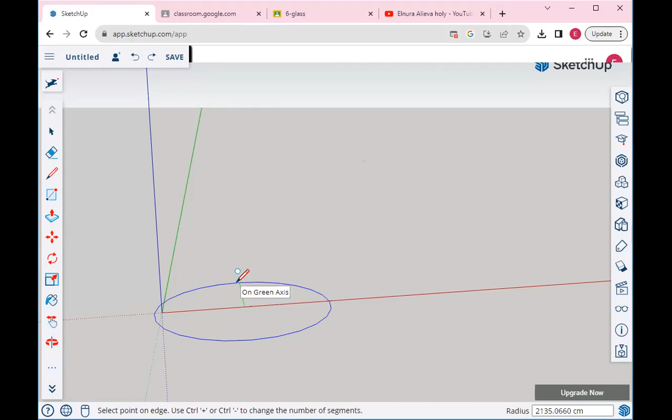Hello guys, today we are going to make a glass like this, and it's pretty easy because this is not so hard as previous examples. First, we are going to use the circle tool to make the bottom of our glass. In this exercise the size is not very important, we are just going to make some glass.

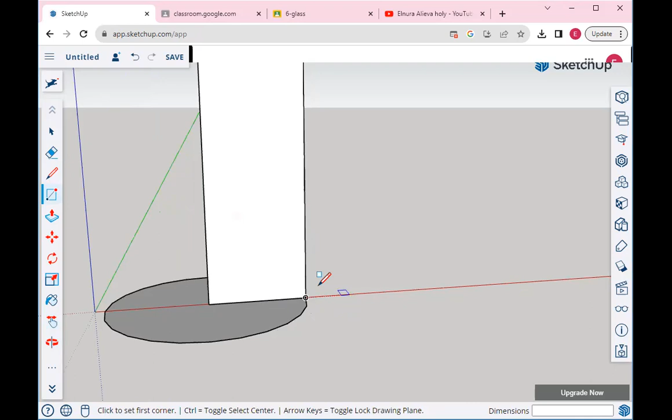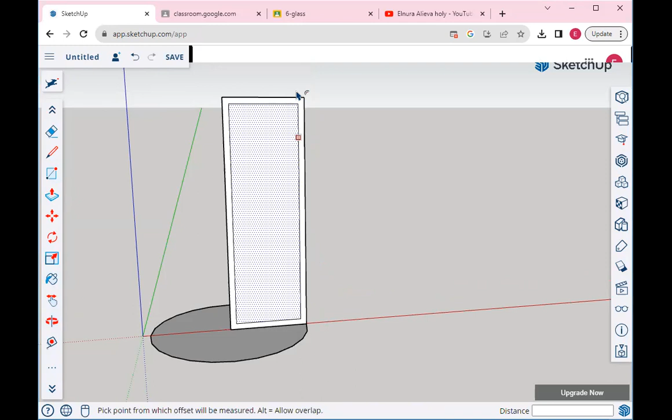So I'm going to make one line that will be vertical. Next, I'm going to make here some rectangle. Okay, if it's on the end, it's beautiful. Now here I'm going to use my beautiful tool called offset tool. It will be much easier for me to use the offset tool for such reasons.

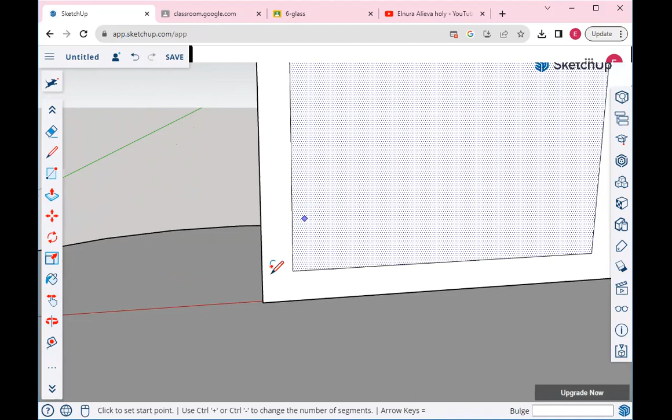Now I'm going to use here the 2-point arc tool. Click once, click here twice, second, and here the third click. And at this point I'm going to make one line, just press click and click. Okay, let's delete everything that's unnecessary for us today. Okay, I have a beautiful thing that I can convert to a glass.

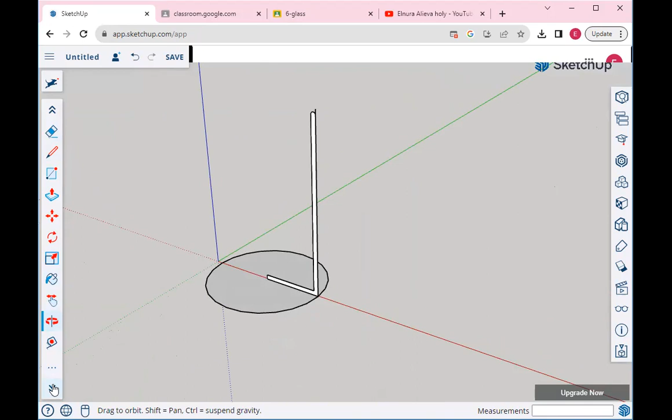Now I'm going to use here the follow me tool, and make it circle. Okay, I have a really beautiful glass.

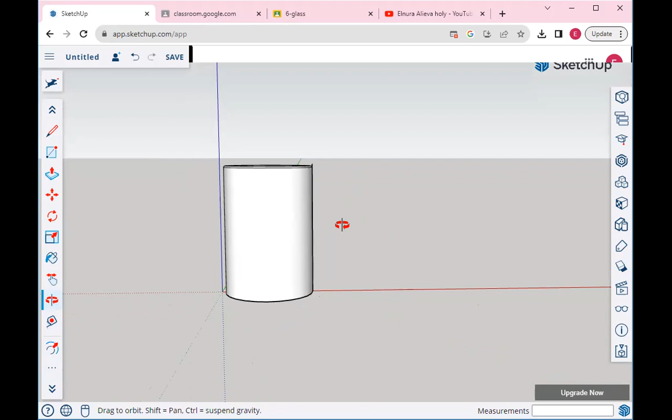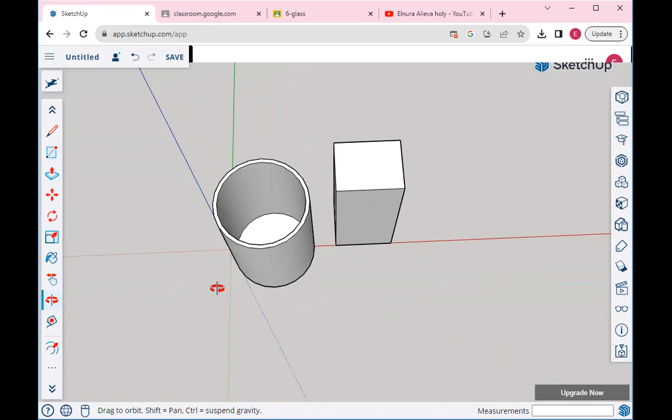Now for the second thing, I'm going to make the handle for this glass. For this, let's draw a rectangle that will be directly on this red line - this red line is a guide for me. I think this side is okay. Now let's make it up and let's check, is everything okay? Okay, I think it's great.

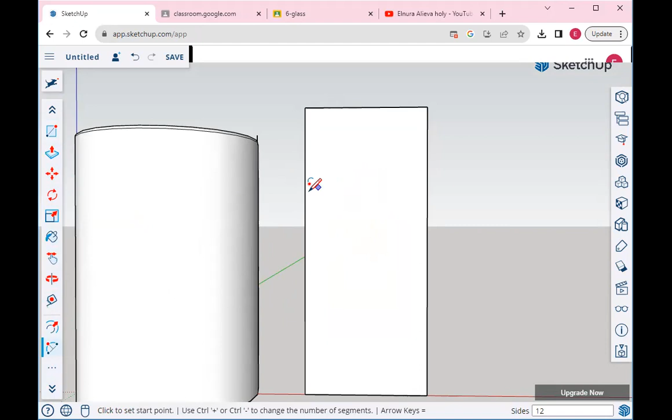Now I'm going to make here something like a handle for this glass. I think it will start from this side. Let's use the 2-point arc tool. It will start from here and here it will be circular, and in the end there will be some line. I think it's okay. If you want, you can make some small difference, up to your wish. Okay, this is okay for me.

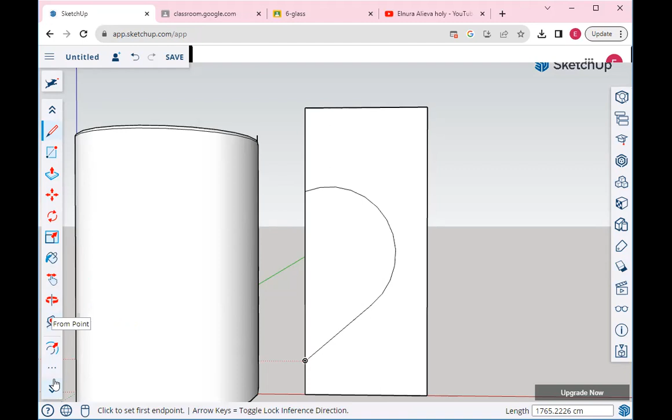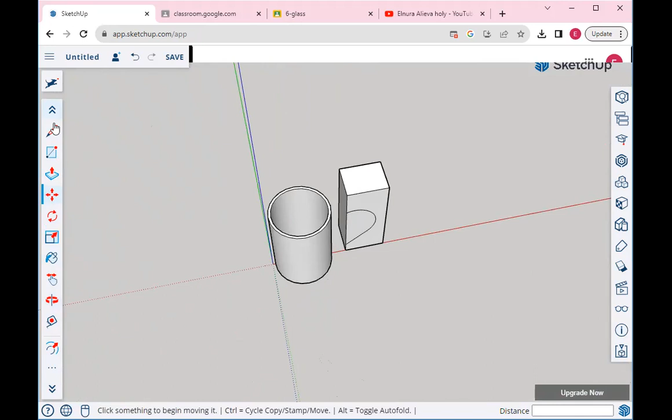I'm going to make something like a circle inside of it. Okay, let's come closer. I made it too close to my glass, that's why it's not very easy for me. Let's make it further from it. Okay, let's move my object a bit, I made it too close. Okay, select the object, now I'm going to move it like this, it will be much easier for me.

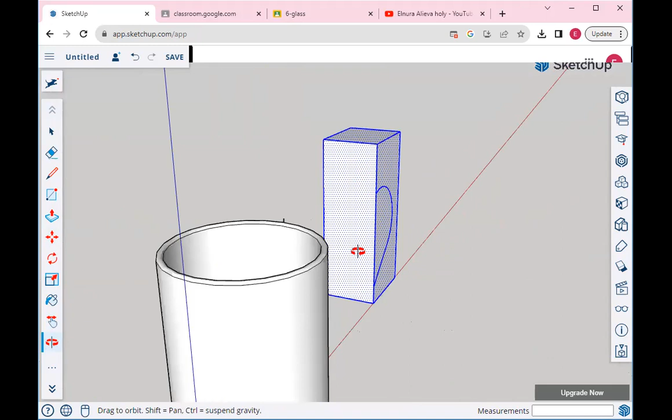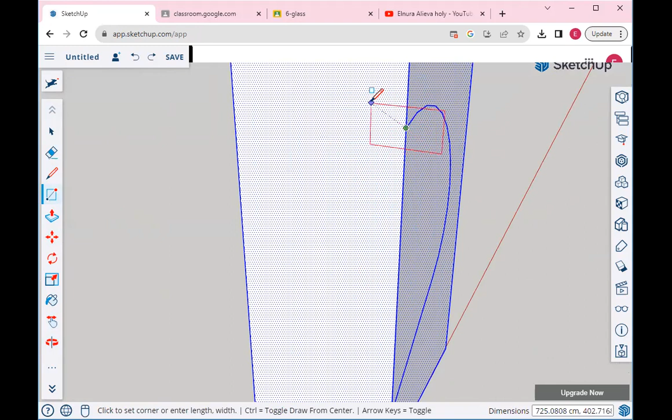Now I'm going to draw here one rectangle, and this rectangle should start from its center. Now if I draw, it's not a center - to make it center, use the Control key. Press on Control, now you are drawing from its center, and I want it to be something like this. Okay, and on its edge, I want to use the 2-point arc tool to make it a bit circular.

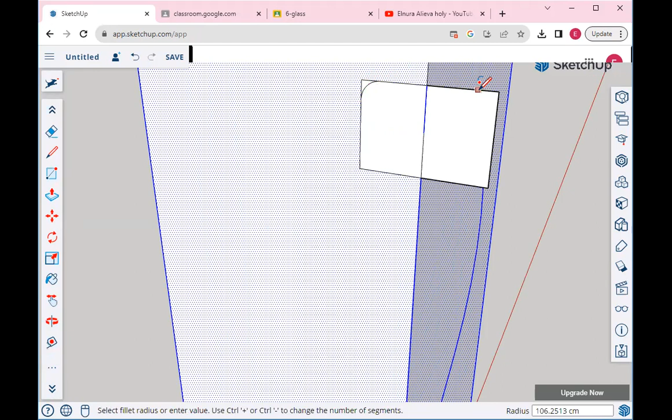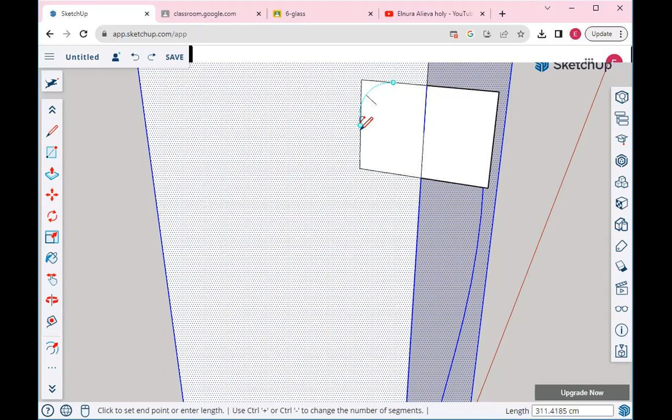Actually, to make the same size things, you can use the 2-point arc tool to come to its midpoint, to its second midpoint. Then the size will always be the same. I'm coming to its midpoint and to its midpoint, to be sure that the size is the same.

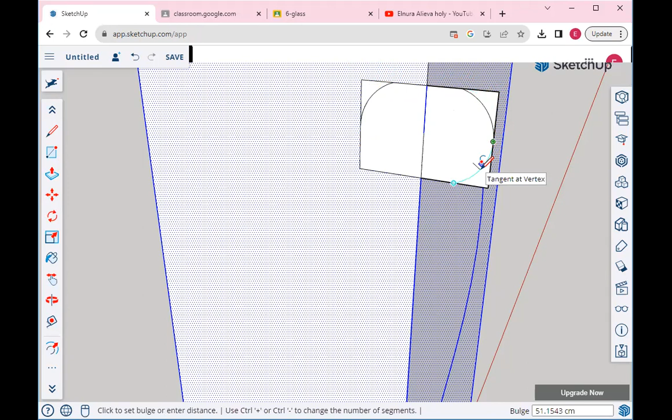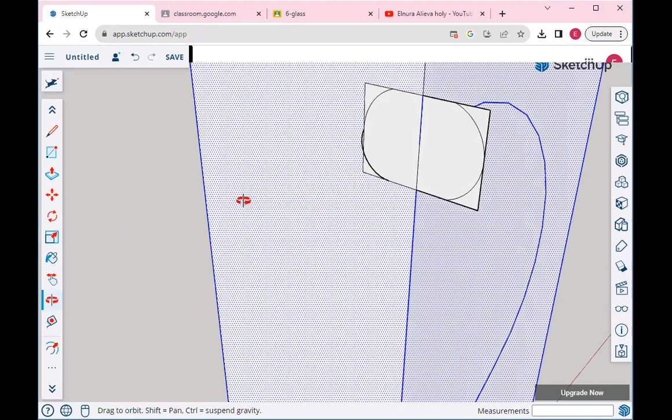Okay, it's beautiful. From its midpoint to this midpoint. I hope everything is great, but I'm not sure about the last line. Yes, the last line is not okay. Okay, let's do it again.

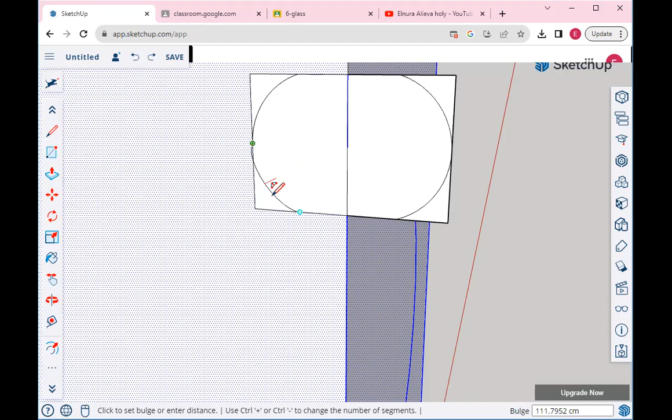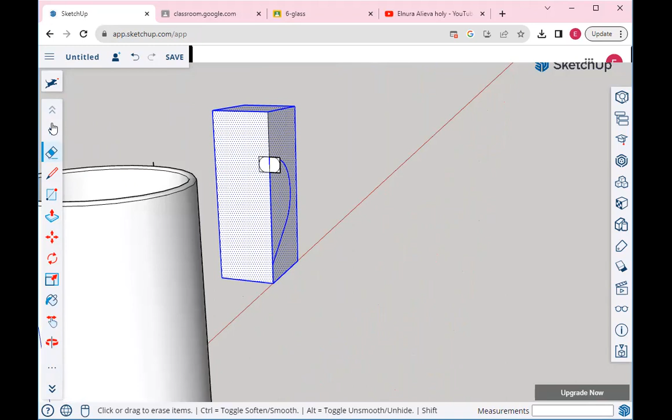Pressing click here, and make it - it should be something like bluish, yes? Come on, work normally. Okay, now it's okay. Now I'm going to delete everything that I don't need, just leave the circular parts. I'm taking the eraser here, first let's untouch it, take the eraser and delete all unnecessary parts. All I need will be this line and the circular part inside, yes.

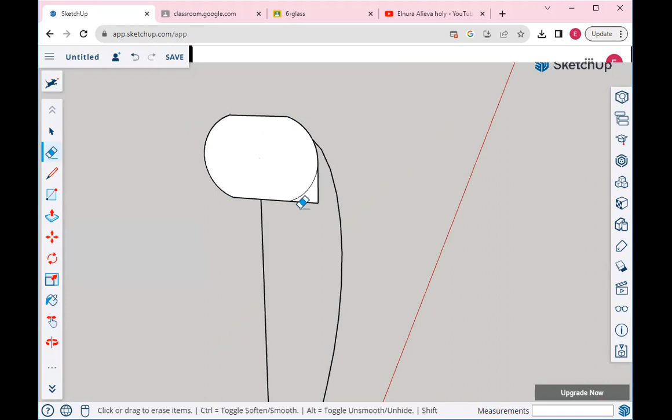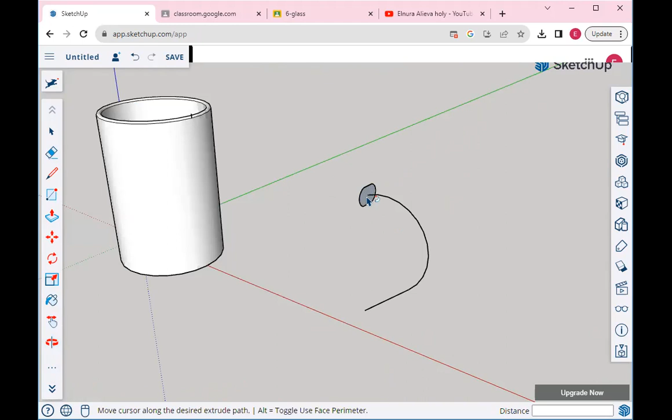Okay, beautiful. Now I'm going to use the follow me tool. But to use it, we have to see its start and its end. Now I see the start, I see the end. I take the follow me tool and use it to make the beautiful handle.

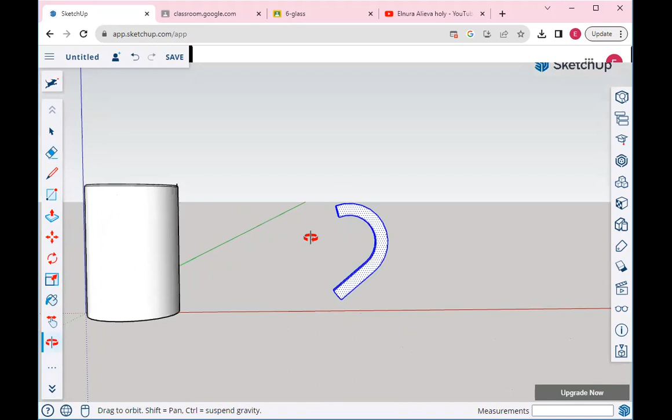Now, what if I try to move the handle? Here, I'm selecting all the things and let's put it the way that will be easier to move. Okay, I think this side will be okay. Using the move tool to move my handle - if it's red, it's great. Now, does it look like a normal handle? I think yes, and leave it.

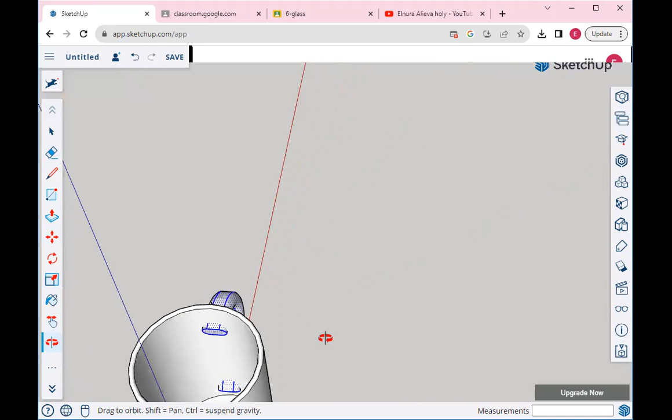Now there will be a small problem inside - as you see, there will be some handle parts that are seen inside. I don't want to see these, I want to delete it. But if you try to delete it now, it will delete the whole handle, that's why we are going to do something different.

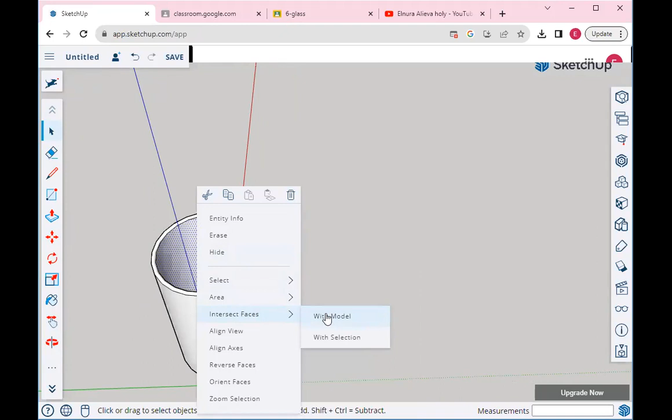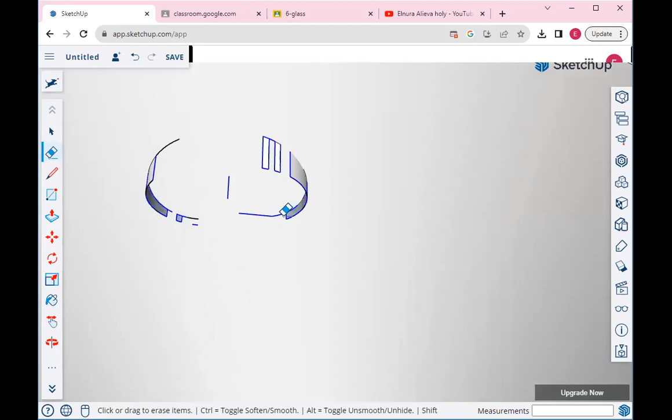Selecting the inside of the glass and say intersect faces with model. Now these lines, the outside of the cup, and these lines are separated, and you can just delete them using the normal eraser. Of course it will take some time to erase all of them, but it's possible. Otherwise, if you don't intersect with model, it will accept itself as a part of the whole handle and will delete the whole handle if you try to delete something inside.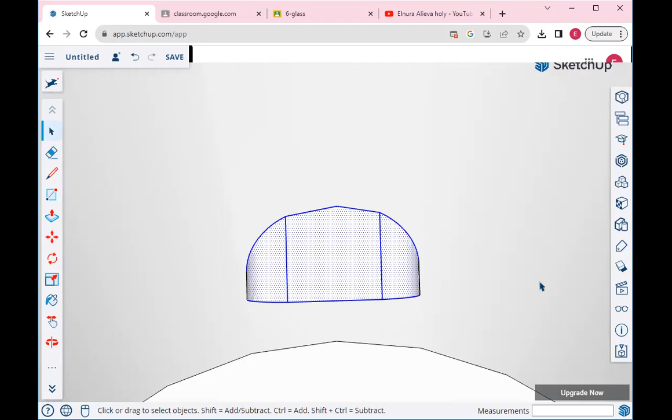Okay, now let's use the selection tool and delete them. Now here, the down part also the same - I'm going to select them all and delete. Oh, by mistake, sorry. Let's delete some parts and after that use this delete everything approach. Now let's try to use it again.

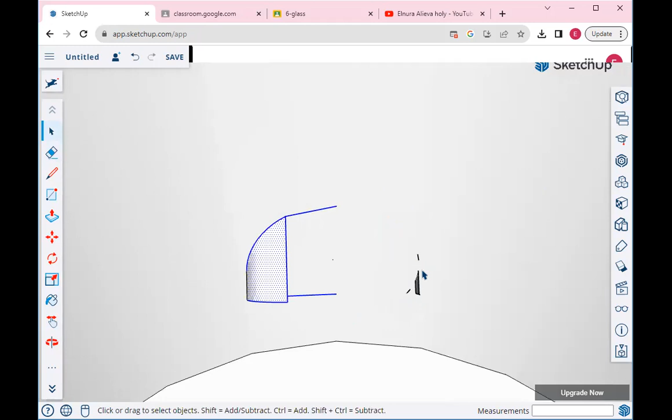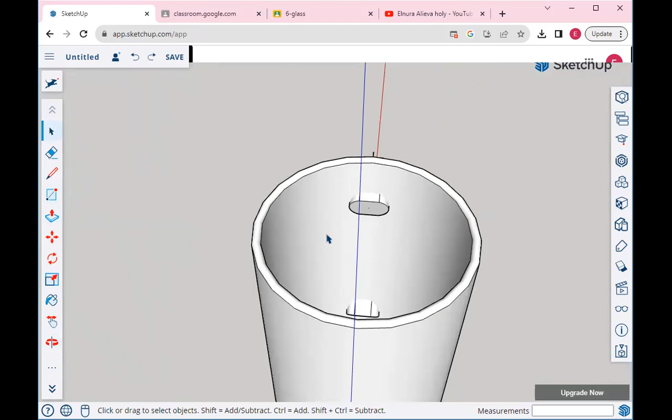Okay, now it's great. Now what are we going to do here - we made the intersect with model. Yes, why is it still deleting everything outside? Okay, let's try to do it again. Click on it, then intersect with model, and try to delete it. It shouldn't delete everything. It's not deleting - okay, don't select them all. I think the problem was there.

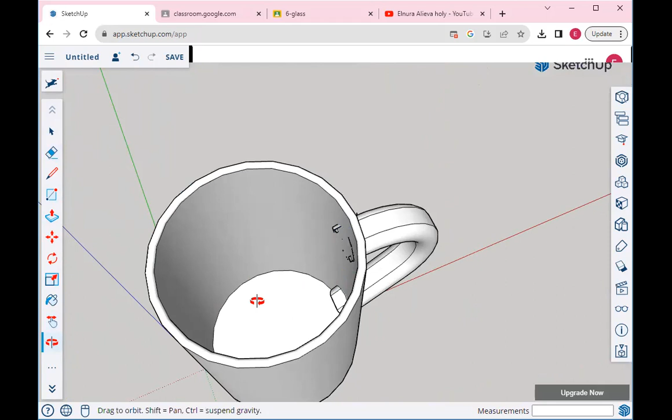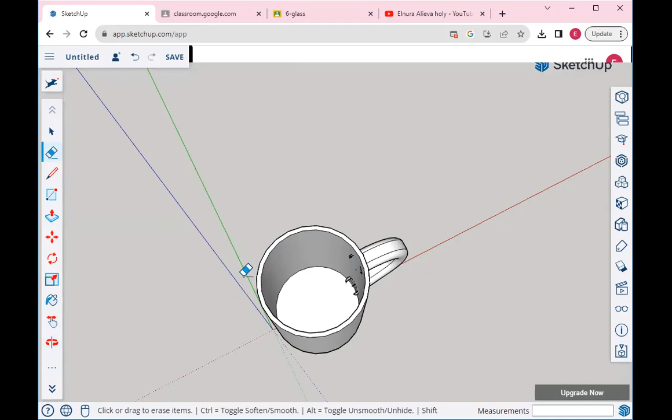Okay, you're going to do it a long time, but you're going to delete everything yourself. Next step, when you finish deleting it all, you are going to recolor it and rotate.

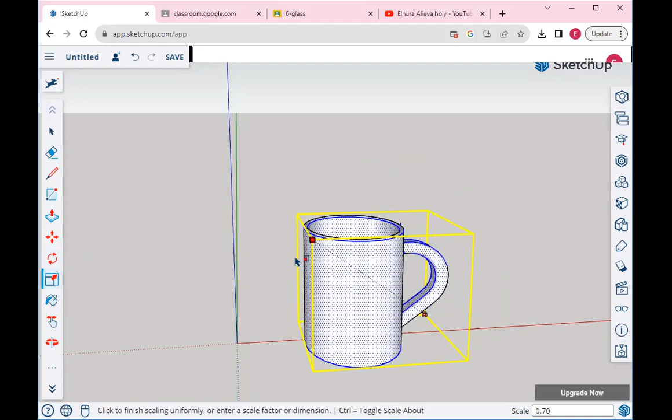To rotate, we use the beautiful thing called rotate. Firstly, let's use some tools - the scale tool can help you change its scale, you can make it bigger or smaller, up to your wish. You can make it this way or like this, or maybe change it vertically or horizontally.

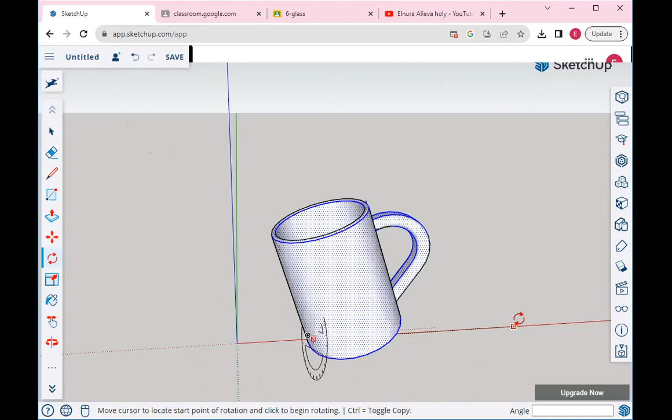Next, there is something called rotating. When you press on it, you can say how you are going to rotate. If you want to rotate it, let's say I'm going to rotate it upon this axis and I'm drawing the lines. Now I can rotate it this way, or you can say I want to rotate it upon this axis - you just select the axis and you can rotate it upon the axis that you select, okay?

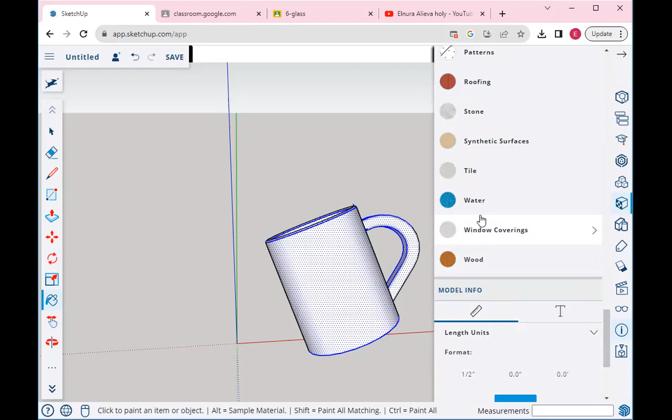Rotate it a bit, then recolor it - it's a glass and I'm going to make it glass-colored. You can color it the color you want. Okay, that's all.